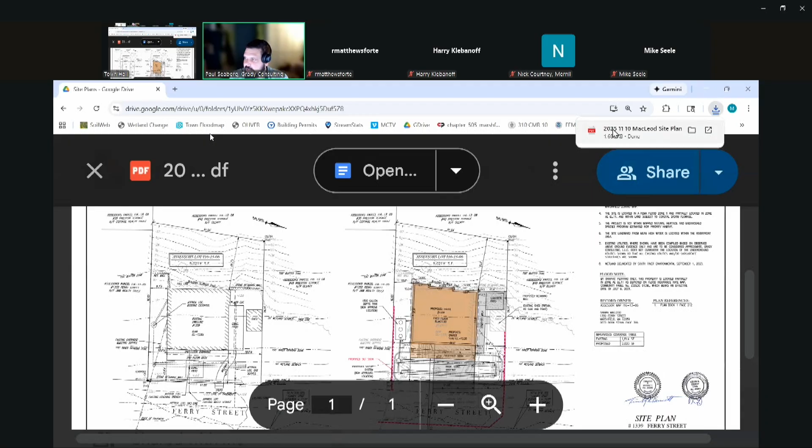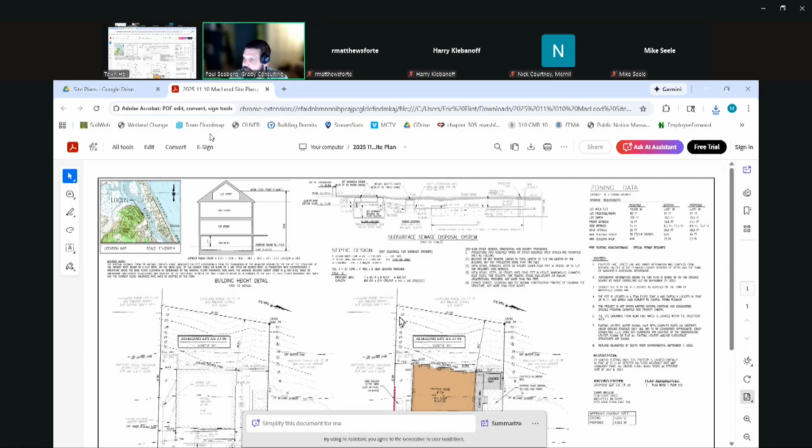The applicant is now proposing to raze the existing single-family dwelling and construct a new single-family dwelling with a concrete driveway. There's a walkway to the right side of the house and also a patio in the rear of the property. The proposed dwelling is approximately in the same footprint as the existing house, but roughly 2 to 3 feet further back from the coastal beach and South River resource areas, which are located opposite of Ferry Street.

The project proposes a small increase in impervious area from 1,814 square feet to 2,023 square feet, an increase of 209 square feet. There are no proposed changes to the septic system. It will remain in the same approved location. And a silt sock erosion control barrier is proposed between the resource area and the proposed work. Be happy to answer any questions the commission may have.

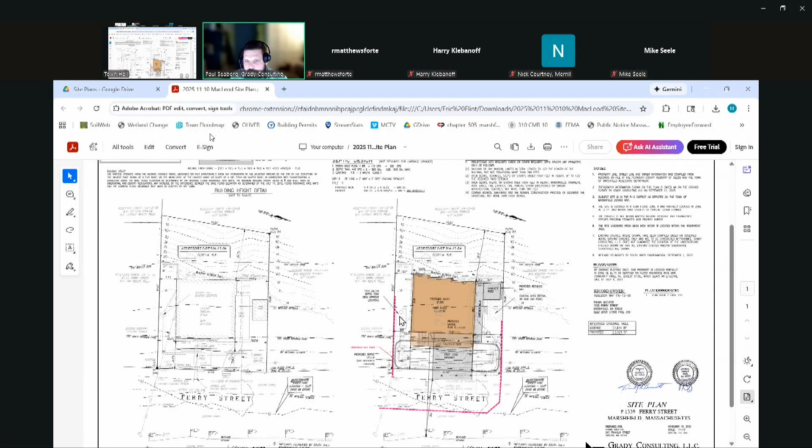All right, thank you. Did you mention the flood zone? The flood zone is not actually on the property itself. It's located right along the front property line. The property itself is located in the Zone X, and there's a Zone AE elevation 10, which falls roughly around the front property line. Sorry, AE elevation 11. Okay, out of the flood.

So one thing, I did read through the notice of intent, and one thing that was checked, maybe in error, was section C on page 7, number 5. Is any portion of the project within an area designated as outstanding resource water? I went on to MassMapper just to double check that, and it looks like it's in, so maybe you can just check the box from no to yes on that one? Yeah, we can do that. I'll have to confirm if that's actually the case. Okay. I didn't see that. I'm sorry.

Yeah, and then also on Mass Mapper, it has this whole area designated as coastal bank as well. Well, the project itself is not within any of the resource areas. Okay. Did you check Coastal Bank too? No, because we're not doing any work in the coastal bank. No, the whole project area is within Coastal Bank. I don't believe that's correct, I'm sorry. The coastal bank would follow the mean high water line of the South River. This project is not in a coastal bank. The site itself is not in a coastal bank.

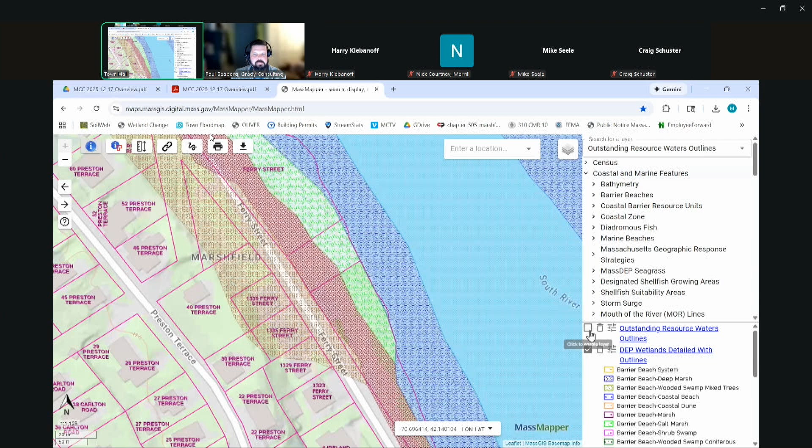And Mike, can you just check the box on there that says outstanding resource water? Yes, I can do that. Oh, no, I meant on Mass Mapper. Yes. I think if you just search for it in the search box, it'll come up. Or you can do the polygon, I think. So yeah, it does look like it's within the boundaries of outstanding resource water. Yeah, if you just click on the polygon instead of outline, it'll show you the whole area when you do the search. Just remove the word outline. It won't let me.

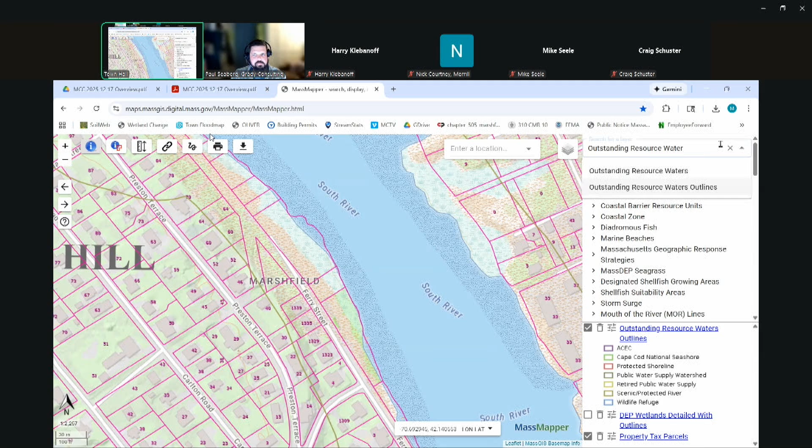There we go. Okay. Yeah, so the site is covered by that. Yeah, the entire South River along Ferry Street is outstanding resource water. Okay, we can definitely make those corrections you requested. Not a problem. And since it's in a couple of resource areas, we want to try to minimize the amount of impervious coverage, so I'd like to see the concrete patio with pervious pavement or pervious pavers. Can you do that? Yeah, I don't see an issue with that. Okay.

And also, it says proposed garage slab. I didn't know if you're adding a garage too? So the garage is underneath the house itself. It's within the footprint of the house. Okay. Got you. All right, so if you can make those corrections and put the coastal bank on the plan, and recalculate the impervious coverage by changing the concrete patio to pervious pavers.

And I think it would be worth asking your client if they would agree to a pervious driveway, and if that would, from an engineering standpoint, be acceptable over a leach field. Yeah, we'd be happy to do that, that's okay. We can continue to provide that additional information and verify that for you.

Okay. All right, then. I'm gonna make a motion to continue the hearing until we have confirmation on the coastal bank delineation and a corrected WPA Form 3, Section C5, and a pervious paver patio and walkway. Can I have a second? Second. All in favor? Aye. And then, Mike, what's the next meeting we can... The next meeting would be January 7th. Okay.

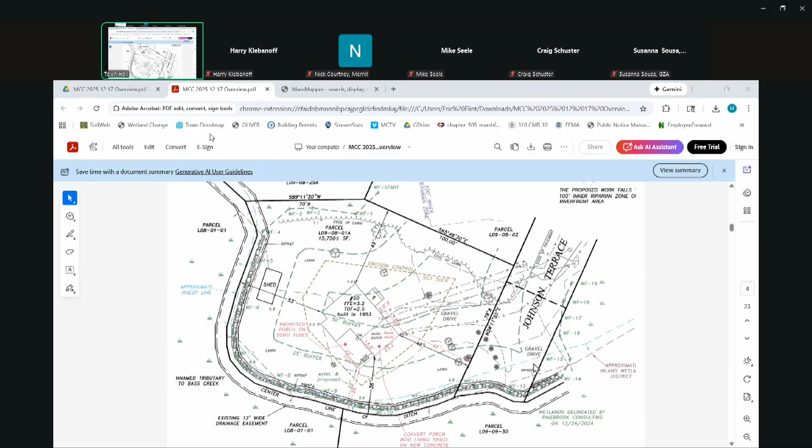Certainly amend the notice of intent to capture any of this work and mitigate for it at the same time with a revised NOI, for sure. Yeah, any plantings you can put along the shoreline would be really helpful to mitigate for that. And that will help strengthen the bank itself, and help limit any additional erosion. Yeah, shrubs and trees have great root systems that help to hold the soil in place.

But the proposed work, if you scroll down to the next sheet, that will show you the proposed building. They are proposing to demolish the existing building and its foundation and adjacent pavement, and constructing this new SRE building, which would be sited further from the taxi lane to meet FAA regulations for the safety of those using the airport. The replacement building will be built on a new foundation, about 36 feet by 55 feet. And the new connecting pavement will be about 1,724 square feet in size.

So the project will result in changes to the impervious area amounts within the project area. And we do have an impervious table, I think at the bottom of this sheet, which shows a 934 square foot increase in impervious area within land subject to coastal storm flowage, which is also the total project area. And of that number, 308 square feet is also within the 75 to 100 foot buffer zone.

So if you scroll to the next sheet, that's our grading plan. The project isn't expected to substantially alter the flood storage in the project area. The topography here is relatively level, and when construction is complete, the grading and overland drainage patterns are expected to be substantially the same as existing conditions. A silt sock will be installed down gradient of the work area prior to construction.

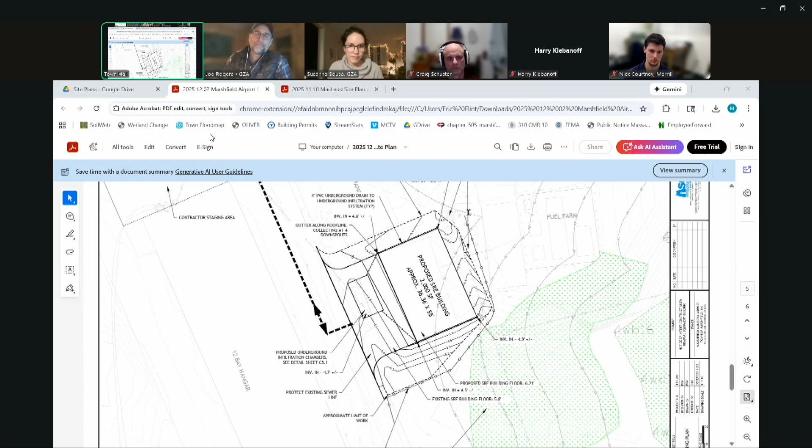If in the event that you did need a permit from them, no work could go forward under our conditions until such permit was obtained. So that's why I wanted to ask you about that. In the introduction, both the letter and the introduction have some kind of vague language. A similar sized building, shifting slightly further, generally in the same location. We typically see much more detailed language than that. I know that you have certain dimensions on the plan and such, but normally we would expect a little tighter language in something of this nature.

I also want to note that you are considering our Marshfield stormwater management standards and, under our 505-308.1, the recently constructed sediment forebays would not be considered regulated resource areas subject to protection under the bylaw because those areas were not regulated wetlands prior to construction of the stormwater system. And then further in your 4.2 Town of Marshfield bylaw, you do not reference 308.1. So I just want to be clear that 505-308.1, rain gardens and other stormwater retention systems.

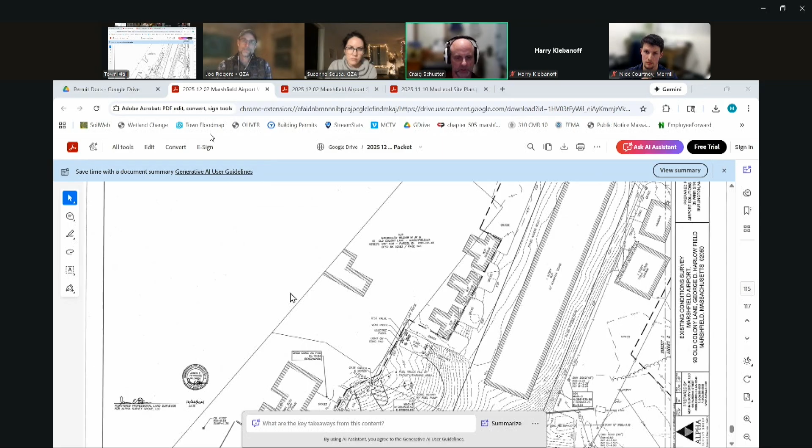Well, what we are looking for is, we have the wetland delineations on there. We don't see any erosion control.

You have a stormwater management plan, which I do not have any issues with. And as I say, you can request an exemption from a registered land surveyor plan. You chose to give us one, but that could be exempt. But I'm just trying to make the point that we don't have a plan that will go on file here with everything captured in one place. Yeah, that's no problem. We can do that. Okay. That's my main concern. We need to have that. Yeah, that's no problem.

Mike? I think a proper way forward, if the applicant was seeking a waiver for that stamped plan by a land surveyor, a letter explaining why the stamp is sufficient for this project, going into the details, and maybe referencing these prior plans that your plan is based off of, Craig, could be a good route forward. Okay, that's fair.

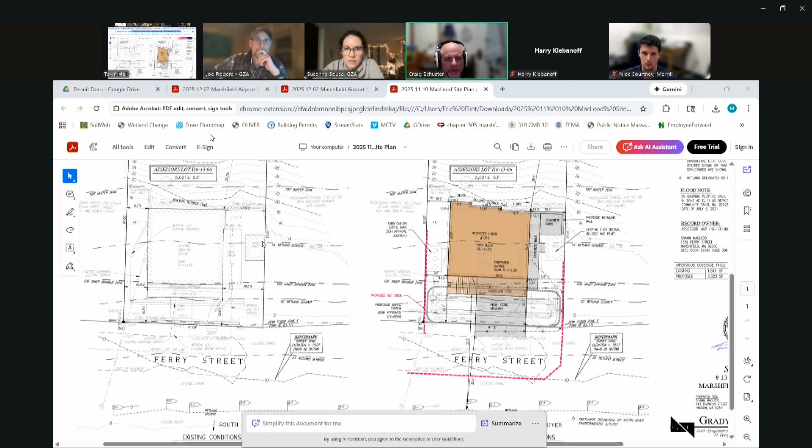Yeah, I'm thinking, considering the holidays and everything, right? So I think I can get my plan together pretty quickly. I just don't know about the floodplain and how quick we can get the town, the floodplain, that resolved. That would be the only issue. But I can probably get that plan done pretty quickly. Maybe a day or something.

Okay, well, here are our hearing dates going forward: January 7th, January 21st, February 4th, February 18th. But what would you like me to just plug in here? Can we plug in tentatively for the 7th, and can I circle back with the team and then reach back out to the agent if it changes? Is that okay? Sure. Yes, that's fine.

Okay, I move that we continue, and we don't have a DEP number yet. I move that we continue 93 Old Colony Lane, raze and rebuild the snow removal equipment building, to January 7th. May I have a second? Second. All in favor? Aye. Aye. Thank you.

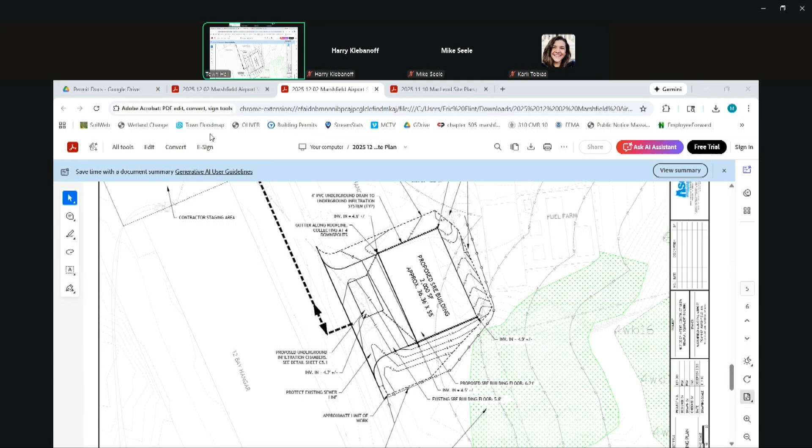Did we discuss what's under the parking area? Is that stone or? It's gonna be a pervious material, either natural gravel base or stone, but for parking, we're not proposing any pavers or any other hardened surface. It will be a natural pervious material underneath. There's some stone proposed between the street access on the left side of the house, just for parking, so we're not always under the building. But we do have adequate parking on the site, and all of it is proposed as pervious.

We need a pile plan? Pile plan would be useful. There's one in the architectural set, and I know that the final structural is being worked up, right? Well, I have a pile plan. The only thing that I don't have is the final framing, which is currently being finished. We don't care about the framing, but if you could put the pile plan on there, and conservation markers on the 25. Sure, yeah.

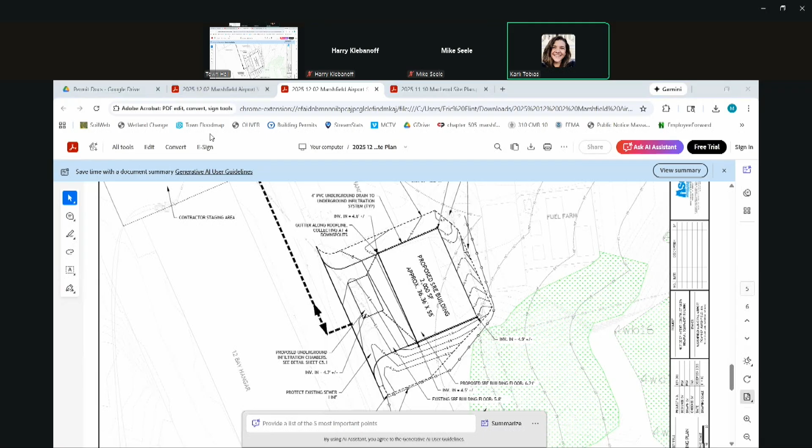I think this plan was well designed for an ADU. ADUs are for affordable living. I know this is the main dwelling. We did our best in designing it on piles, making it compliant with everybody's biggest conversation, which is runoff water. And I think Stenbeck and Taylor did a wonderful job. And also having this up on piles really helps with that too, on such a small lot.

So I know one of the big questions was the pile plan. You could have that in your hands by tomorrow with the framing. And then Stenbeck and Taylor can work on getting that on their plan themselves too, so you can see where they're sitting on the lot. But I just wanted to chime in, if you had any questions for us design-wise. They're not easy to design.

These boards aren't easy either, and I feel for everyone that has to go through the zoning boards, the site plan review boards, planning, X, Y, and Z. So Andrew did mention to me that we might have to go to ZBA, and we worked it out that we actually don't need to go to it. It's such a new entity for everybody. There's so many gray areas, so everybody's just trying to cover their ground as we are here on this plan.

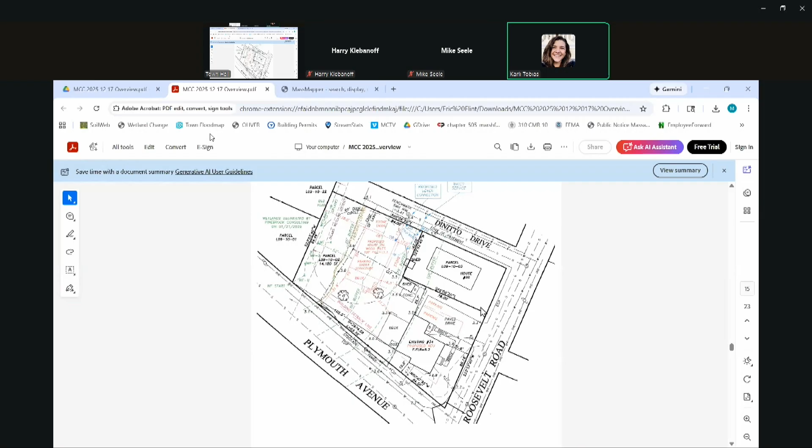But I just wanted to say hello and let you know, William, that you do have your pile plan, so we can get that in hand to you tomorrow. Thank you. Thank you, Karli.

So I think, based on our jurisdiction, I know we've had conversations about working together with the other departments, and I think based on where we stand tonight, that we could move forward with making a decision. Do you agree? Agreed. Okay. Mike, did you have any special conditions?

Yes, I would suggest the following special conditions. General conditions 1 through 18, which are standard special conditions. Prior to construction, condition 5 and 2, to have the site staked out and have a pre-construction meeting. During construction, condition 11, ensure best management practices are followed. After construction, condition 1, to file for a certificate of compliance. Erosion control, condition 1, to ensure erosion control is in place and effective throughout duration of work.

To provide an elevation certificate at the conclusion of work for the final built structure. Those 3 conservation markers on the edge of lawn should be added to the site plan, and also the pile location should be added to the site plan. If we could get those in by Friday, that would be preferable.

All right, so I will make a motion to close the hearing and issue an order of conditions subject to the conditions mentioned by Mr. Seele. May I have a second? Second. All in favor? Aye. Aye.